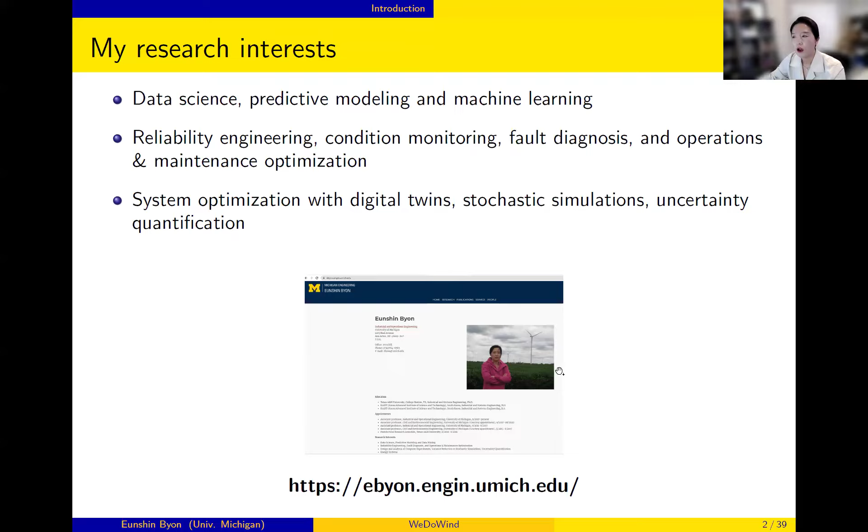Today I'm going to discuss my research on data-driven wake effect characterization. Before presenting, let me introduce myself - my research includes data science, predictive modeling, machine learning, reliability engineering, condition monitoring, and fault diagnosis. My dissertation, like a decade ago, was about operations and maintenance optimization in wind turbines. Recently I'm working on system optimization with digital twins and stochastic simulations, as well as uncertainty quantification.

This presentation consists of two parts. If I don't have time, probably I'll miss part two. Both are related to wake effects. The first part is the data-driven wake effect characterization for operational wind farms.

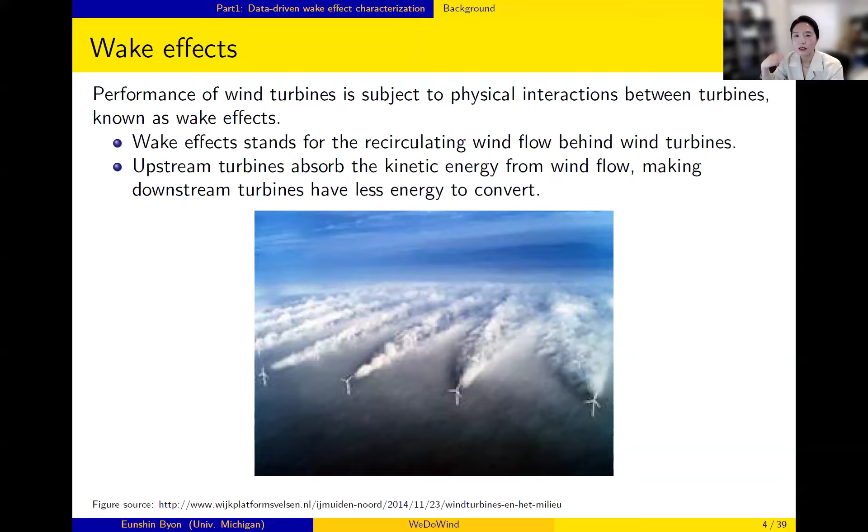I guess the audience of this seminar knows about wake effects, so I probably don't have to explain much. But basically, the wake effect stands for recirculating wind flow behind wind turbines. Here in this study, we use data collected from an offshore wind farm consisting of more than 30 turbines.

Here is the rough layout. Due to confidentiality, I didn't show the exact layout, but we modified it a little bit. This wind farm has regular positions of turbines. You can see that the dominant wind flow is westerly, so from west to east. There is one meteorology tower that collects weather conditions, including wind speed, direction, and other operational conditions.

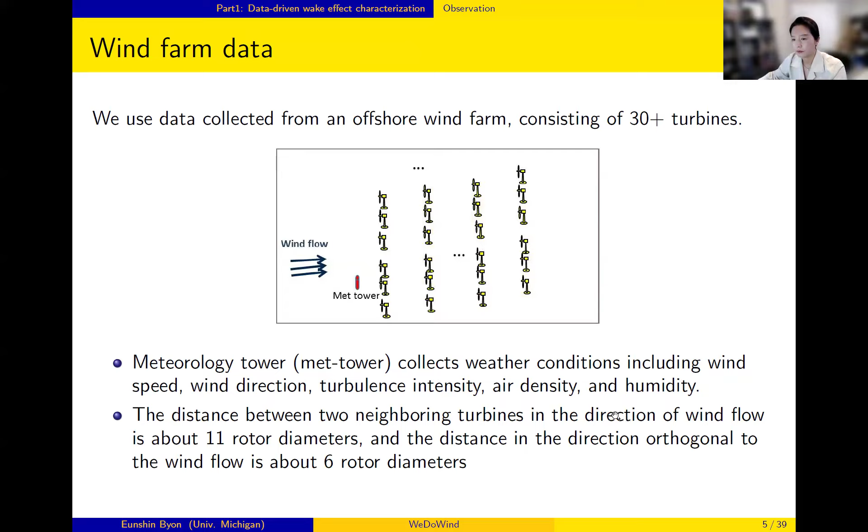The distance between two neighboring turbines in the direction of wind flow, so the distance between two rows, is about 11 rotor diameters, and the distance in the direction orthogonal to wind flow is about 6 rotor diameters. And we did some exploratory data analysis.

So we first choose two turbines. As you can see, turbine A is one of the turbines in the first row, so the upstream turbine, and turbine B is one of the turbines in the last row, so the downstream turbine.

The right figure shows the scatter plot from these two turbines, and the x-axis is the free flow 10-minute average wind speed measured at the met mast - not the wind speed measured in the nacelle, but at the met mast. The y-axis is the power generation from these two turbines. The black cross is power from turbine A, and the red circle is power from turbine B.

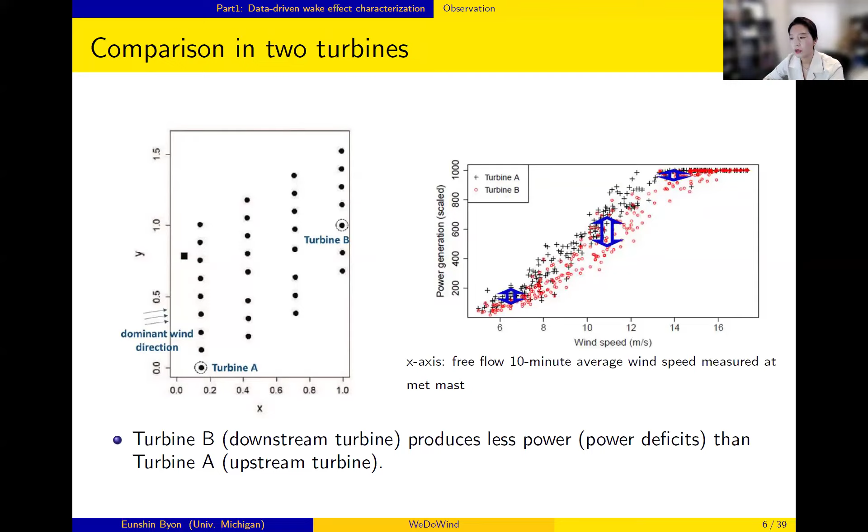Of course, they kind of follow some sort of S shape, which we typically observe in turbines - this is the power curve. However, turbine A tends to generate more power than turbine B, so turbine B experiences some sort of power deficit, and of course that's due to the wake effects.

We extend this analysis to multiple turbines. Here are the power variations among these turbines in this wind farm when wind speed is around 12 meters per second - the darker, the more power. We normalize the power level between 0 and 1,000. As you can see, the turbines in the first row generate a higher level of power compared to other turbines. Second row, less. Third row, more or less. The last row generates the least level of power.

So this turbine-to-turbine variation is very clear when wind speed is around 12 meters per second. Then when you look at this power variation in other wind speeds, interestingly, this variation was not very clear when wind speed is low, around let's say 5 meters per second - close to cut-in wind speed.

The reason is that when wind is slow, the blades rotate slowly, so they extract a minimum level of power energy from the wind. So the wind deficit in the downstream turbines is not really significant, and there are no clear power-to-power generation differences. Also, when wind speed is high, after the rated wind speed, the upstream turbines use pitch control, so they don't extract the maximum level of power they can. So the downstream turbines still face incoming wind with sufficient energy to convert to the rated power.

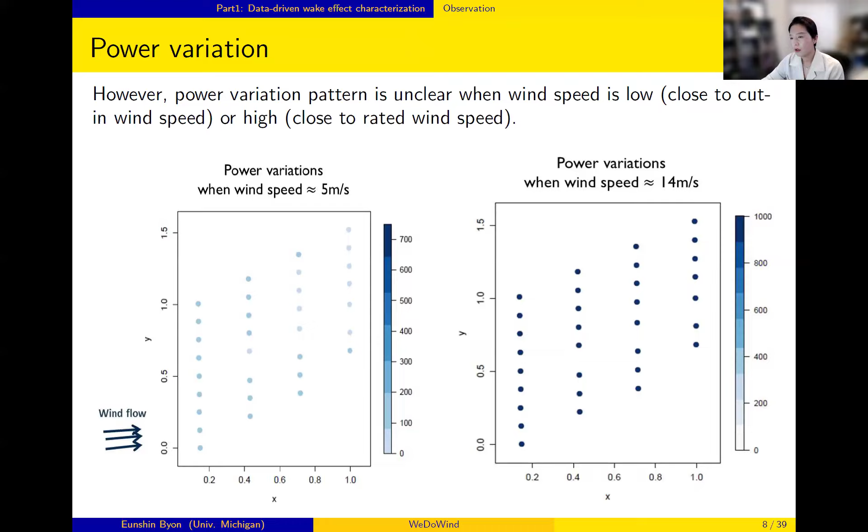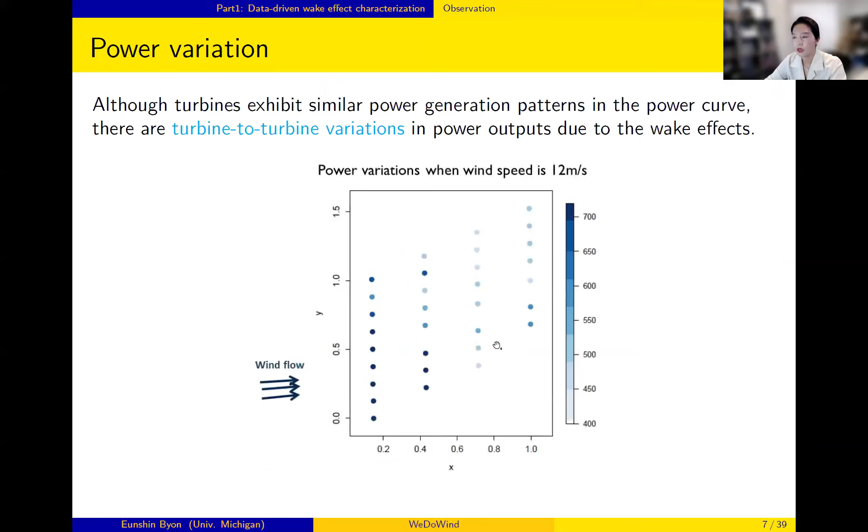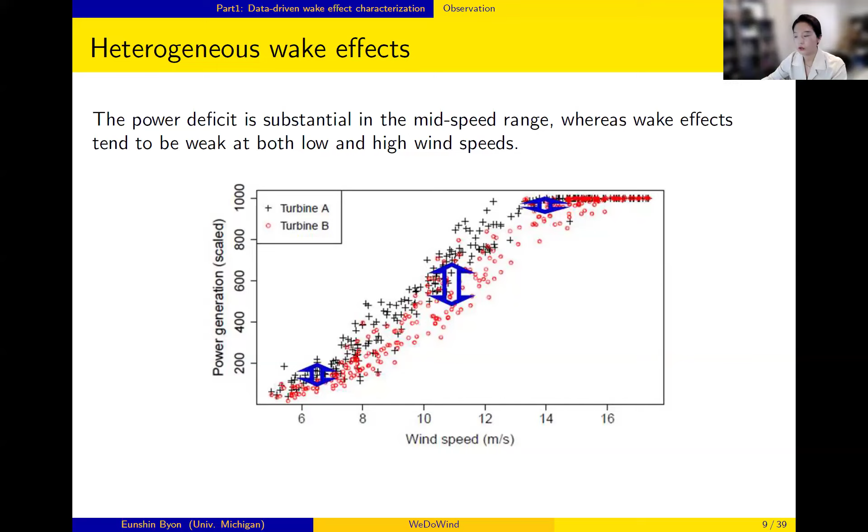After some wind speed, there is no clear power generation difference. Also, when wind travels from upstream turbines to downstream turbines, they can recover energy from the wind to some extent. So depending on wind speed, we see clear or unclear differences. If we look at turbine A and turbine B, the difference is clear when wind speed is in the mid-range, between 10 and 12, but not really clear when wind speed is close to 5 or after the rated wind speed. So we want to characterize this heterogeneous power deficit or wake effect in a multi-turbine wind farm.

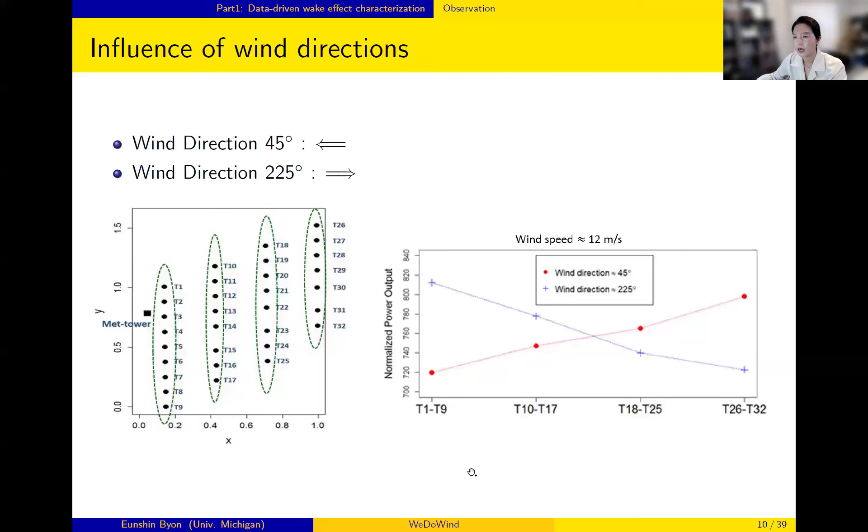Considering this heterogeneous wake effect depending on wind speed and wind direction, we develop a data-driven wake model for an operational wind farm using data, and we investigate how power generation varies across individual wind turbines under different wind conditions.

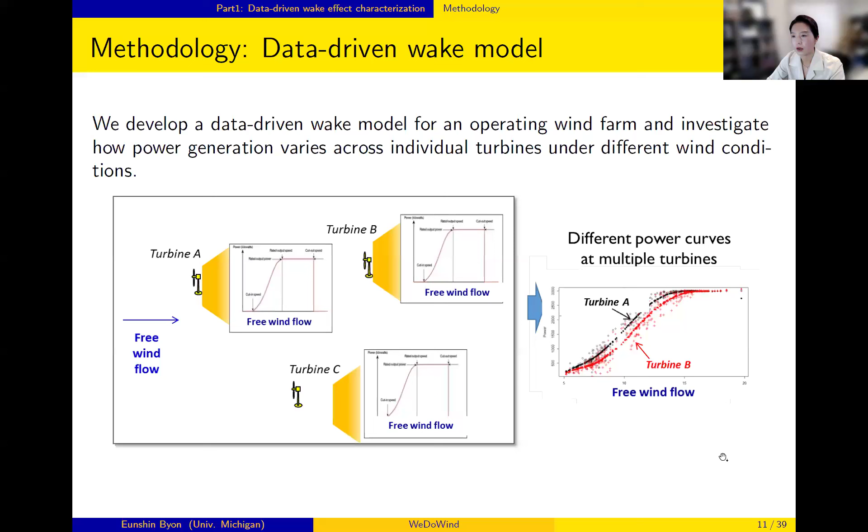Our goal is to characterize this power curve under free wind flow. Mostly the power curve uses the incoming wind for each turbine, but here our goal is: let's say we have free wind flow coming to the wind farm, our x-axis is the same wind flow across all turbines, and y-axis is the power generation from individual turbines. If turbine A is upstream and turbine B is downstream, we will have different power curves due to the power deficit or wake effects. We want to construct a heterogeneous power curve of multiple turbines, which depends on wind condition.

Our methodology is statistical modeling. We decompose the power output into global and spatial terms. The black curve is the average pattern, the average power curve shared by all turbines in a wind farm. But there is turbine-to-turbine variation.

For upstream turbines, the red dashed curve is above the black average curve, meaning the upstream turbine's power curve is above the average power curve, but downstream turbines' power curve is below the average power curve. So there is turbine-to-turbine variation, or spatial variation. We want to decompose the power curve into two parts: the average pattern shared by all turbines, and the turbine-to-turbine variation. Here is the modeling.

Yi is the power at turbine i, and x is the weather or wind condition. We have this global pattern, or average pattern, shared by all turbines, and we have the turbine-to-turbine variation, the spatial term. This S function captures the heterogeneous wake effects, which depends on weather condition. So S is not constant, but depends on weather condition X. X includes wind speed, wind direction, and turbulence intensity.

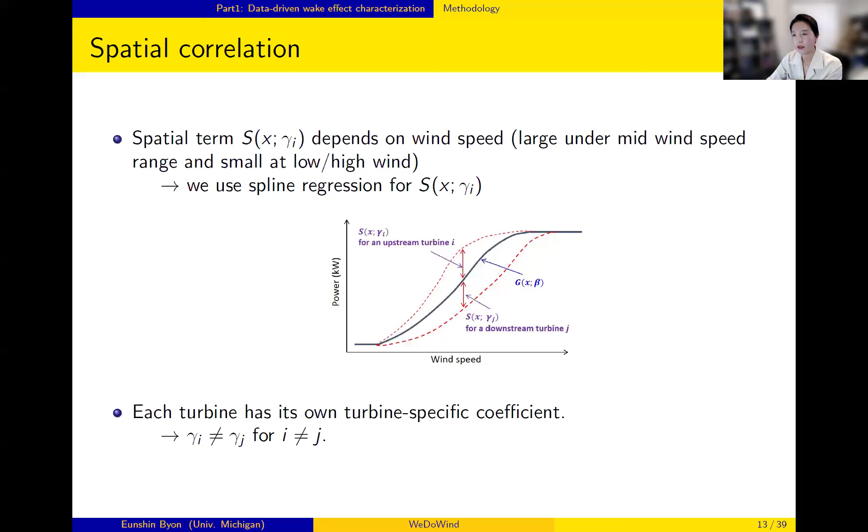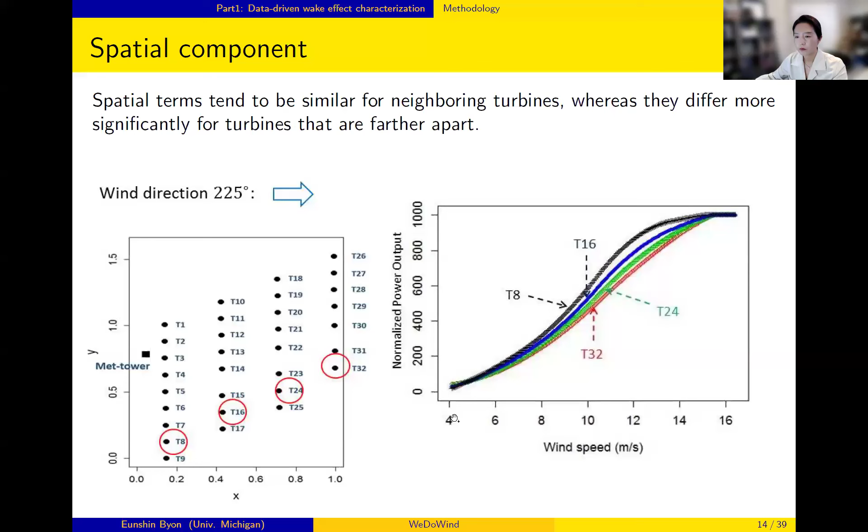To reflect this kind of similarity and dissimilarity, we use a Gaussian Markov Random Field. We formulate the interdependency or interaction among turbines using GMRF. The idea is that here is the coefficient of turbine I, and this coefficient should depend on the coefficient of neighboring turbines. So Ni is the set of neighbor turbines.

For example, let's say turbine C. Turbine C's coefficient should be dependent on the neighboring turbines. Here the red circle shows the neighboring turbines. So gamma I, the gamma for turbine C, should be close to the gammas in these neighboring turbines. That is the basic idea.

Then how much should they be similar or dissimilar? Here, Cij captures the similarity. So Cij is the interaction intensity between turbine I and turbine J. To formulate this Cij, we look at the dependence in the direction orthogonal to wind direction and also parallel to wind direction. So we consider both wind directions, and also the distance between turbine I and turbine J.

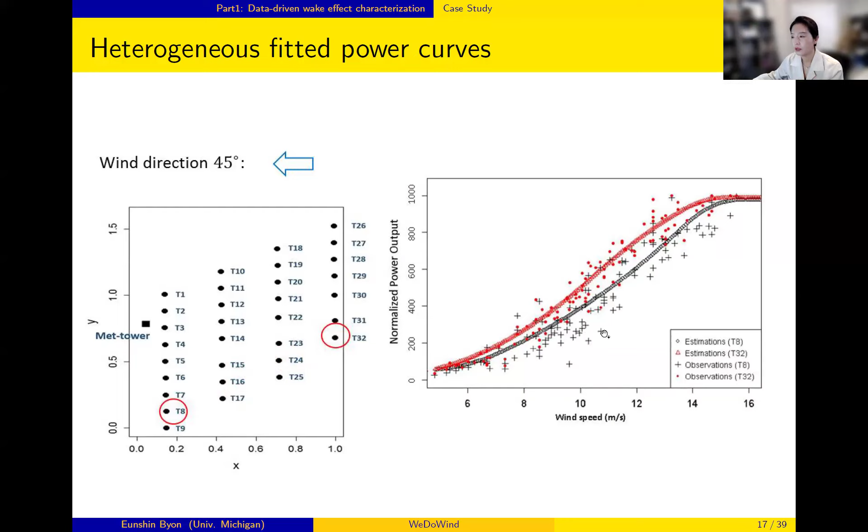After this modeling, here is the power curve which briefly estimates each turbine's power curve pattern. When wind direction changes from east to west, T32 becomes the upstream turbine and T8 becomes the downstream turbine. Here the dots are all the data from these two turbines. Red is the data from T32, and you can see that red is above black in most cases, and our power curve captures this kind of heterogeneous pattern pretty well.

You can also see that this heterogeneous power deficit is very clear when wind speed is around 12, but the deficit is very small when wind speed is small and also when it's large.

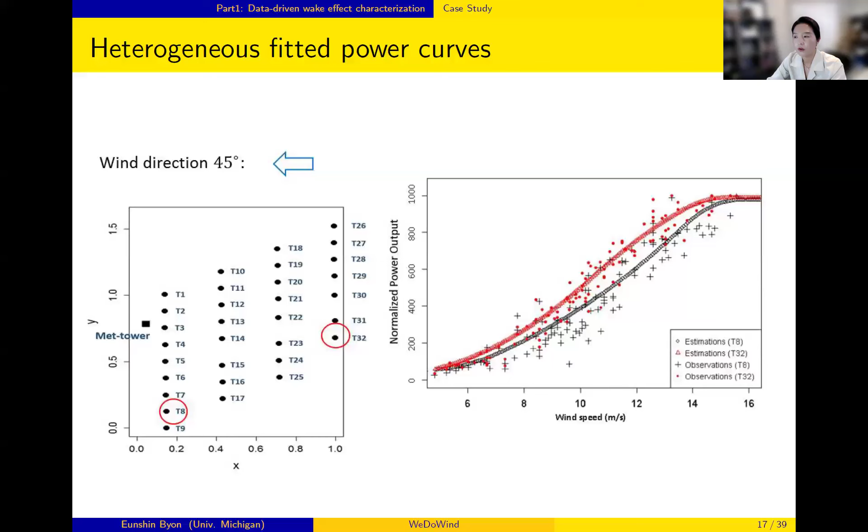But when wind direction is around, let's say 320 or 340, that's the direction from north. In that case, T8 becomes really the downstream turbine, so it generates less power. In other cases, depending on direction, its power level is different. So even though we have the same wind speed around 12 meters per second, the generated power level from T8 is really different depending on wind direction.

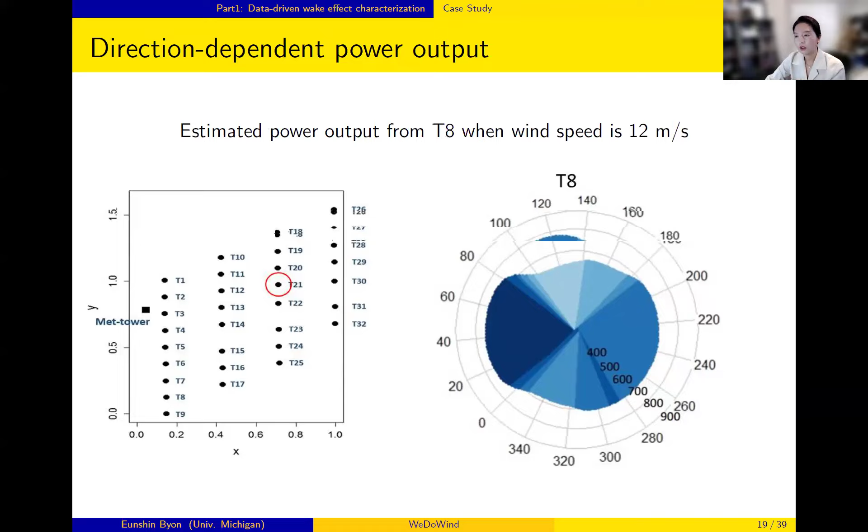This is the power output from T21. T21 is in the middle of the wind farm, so regardless of direction, it's always a downstream turbine. It is affected by other neighboring turbines' rotation, the blade rotation. So we can see that in all cases, it doesn't really show big differences. For example, T8's power level is so different depending on direction. However, T21, being in the middle of the wind farm, generates a similar level of power regardless of wind direction.

But as wind speed increases further, the wake effects become less intensified because of pitch control. So as wind speed goes above rated wind speed, this range becomes smaller, and eventually when wind speed hits about 16 meters per second, there is no big turbine-to-turbine variation, and the deficit becomes much smaller.

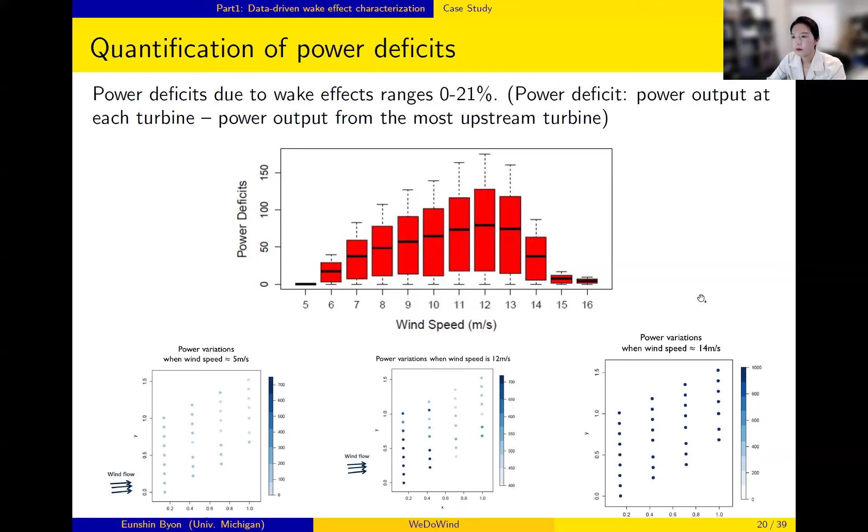Here we compare the performance using data from this offshore wind farm. We use a small data set of 300. Mostly this is data from the dominant wind direction, sort of clean data. Power output is normalized between 0 and 1,000, and this is the result from tenfold cross-validation.

We compare our approach with a global model and an individual model. The global model uses just one power curve for all turbines, and the individual model fits a power curve for individual turbines separately. We use three metrics: RMSE, MAE, and MAPE.

We can see that in all metrics, our approach was better than other models. Compared to the global model, our approach produced 13 to 15% lower estimation errors.

Compared to the individual model, our approach's performance improvement is not really clear because the individual model also fits an individual power curve, so in terms of estimation accuracy they should be similar. However, the individual model uses a lot of models—basically for 30 turbines, it uses 30 different models.

On the contrary, our model just uses one model. So even though we have similar estimation accuracy, our model uses a much less number of coefficients. Also, our model characterizes the interaction among turbines, whereas the individual model doesn't really characterize any sort of interaction to understand the wake effects.

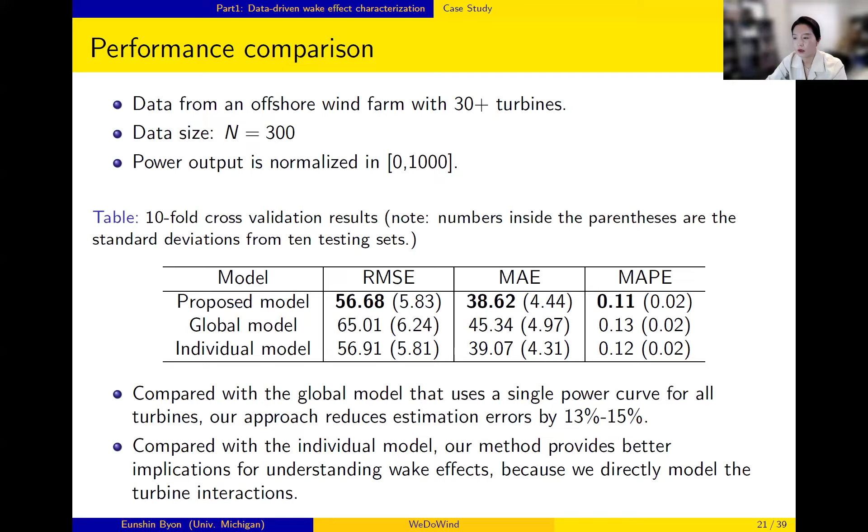We apply this approach to quantify—so far this is the result from a couple of papers—and then we apply this approach to quantify the power gain due to turbine upgrading or retrofitting. I understand this audience has discussed this power gain due to vortex generators several times.

So probably all of you know vortex generators. I don't know the physical characteristics of VGs, but VGs are one way to enhance blade lift characteristics to improve production efficiency. However, this type of upgrading or retrofitting is costly.

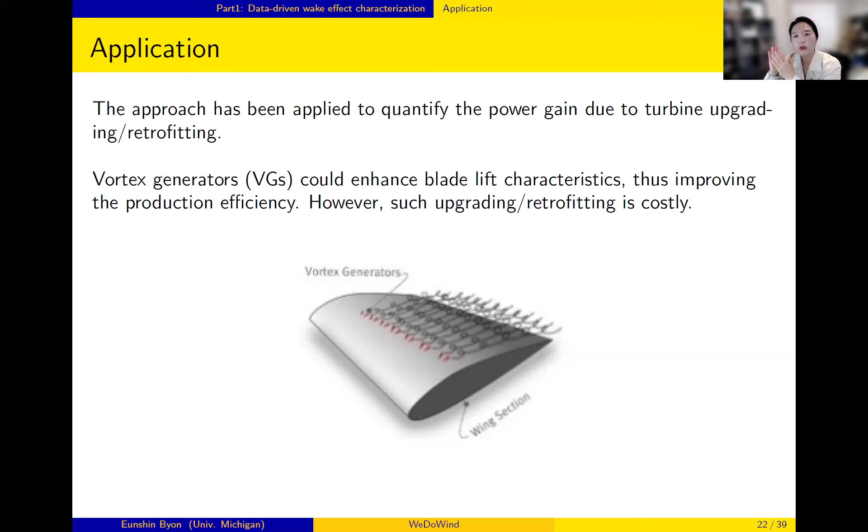So we met one of the utilities in Michigan, and they wanted to know whether VGs are really helpful and beneficial to improve power generation efficiency. They also wanted to do a cost-effect analysis, so they shared their data with us.

Actually, the data was very noisy, and also they didn't really have the Met Tower. So this result just represents the benefits of our wake model, but the numbers may not be so reliable because the data was very noisy. But I want to show how our wake model can be used for retrofitting analysis.

They installed VGs on some turbines, not all of them. So they have multiple turbines in a wind farm, and they installed VGs on some turbines. They have data before the VG installation and after the VG installation.

Here is the data, or the fitted power, from two turbines, T3 and T31. VGs were installed on T3, and T31 is a control turbine, so they didn't install VGs there. In the left panel, you can see the estimated power for T3—blue is after VG installation, red is before VG installation. After the VG installation, the power curve is shifted upward.

So there is a clear power gain, and we can see that the power gain is quite clear when wind speed is around 8 meters per second. So this looks good.

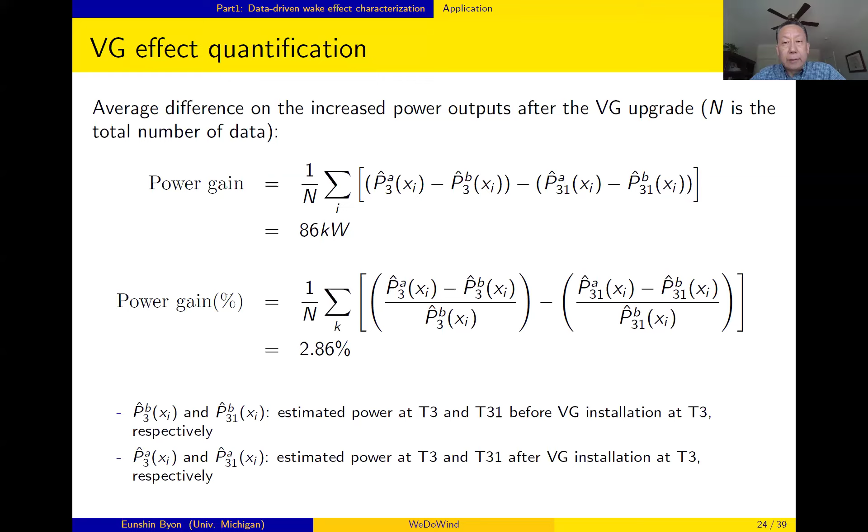Quick question: turbine 31 is not the nearest to turbine 3, right? That's a good question. Turbine 31 is shown here to illustrate the relative difference.

We also looked at the power gain at the neighboring turbine of turbine 3, which was really interesting. Say we have turbine 3 and turbine 4, where turbine 4 is the downstream turbine under the dominant wind direction. Interestingly, turbine 4's power gain was also clear, even though turbine 4 didn't have a VG installation. After turbine 3 got its VG installation, turbine 4's power gain was also positive compared to turbine 3.

I don't know the exact physical phenomena, so I looked at references and found an article saying the VG stabilizes wind turbulence, which positively influences downstream turbines. So when a VG is installed, it not only affects that turbine but also positively affects the immediate downstream turbine. I didn't show this result here because the data is quite noisy.

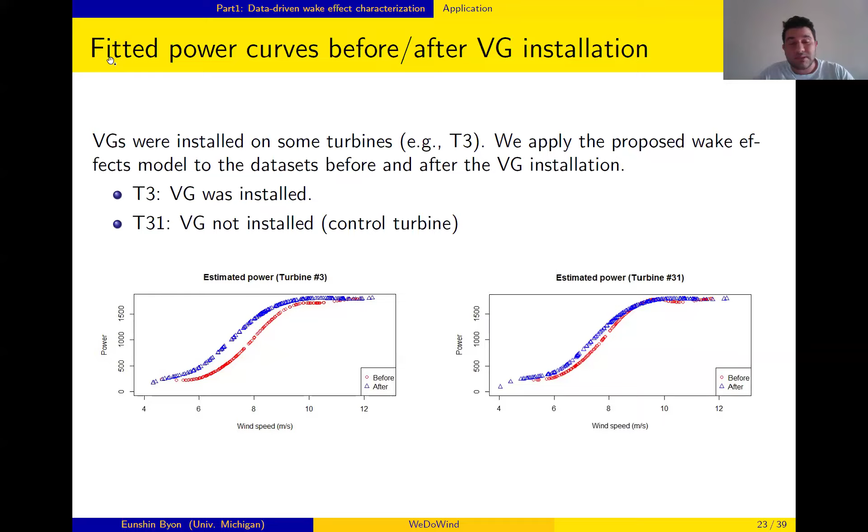Other questions? Yes, I have a question. On the slide, I think it was slide 14 or 15, you defined the set Ni, the nearest turbines.

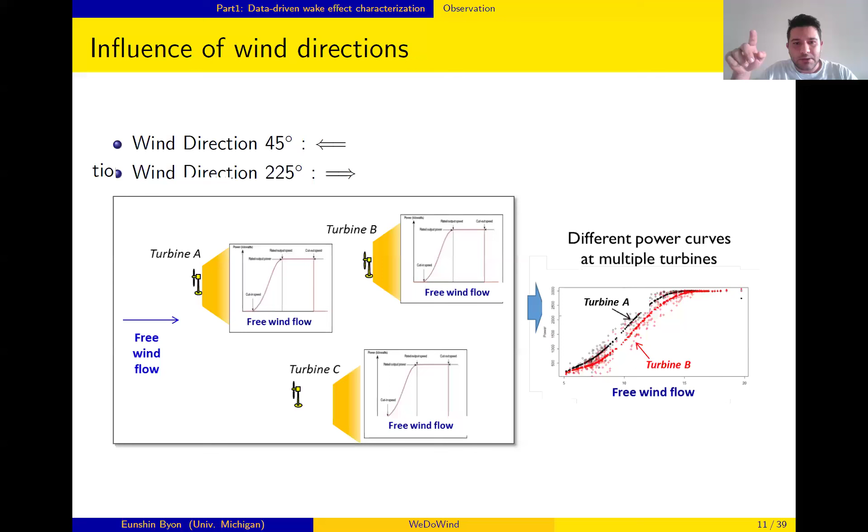So to learn the parameters of each turbine, you define a set of nearest turbines, Ni. I'm wondering, since this definition takes the closest turbines, for those turbines in the corner of the farm you will have fewer neighboring turbines. Does that affect the model's performance by any chance?

That's a good question. First, the first order neighbor turbines are shown in red, and the second order includes the first order plus other surrounding turbines. When we tested the accuracy between first order and second order neighbor turbines, we didn't really see a difference, so using just the first order neighbor turbine was enough.

For the turbines at the boundary, as you said, we have fewer neighbor turbines, but the accuracy wasn't really deteriorated, because we still have neighbor turbines either upward or downward. So we didn't really see sensitive results depending on the location of turbines. Thank you, that's a really good question.

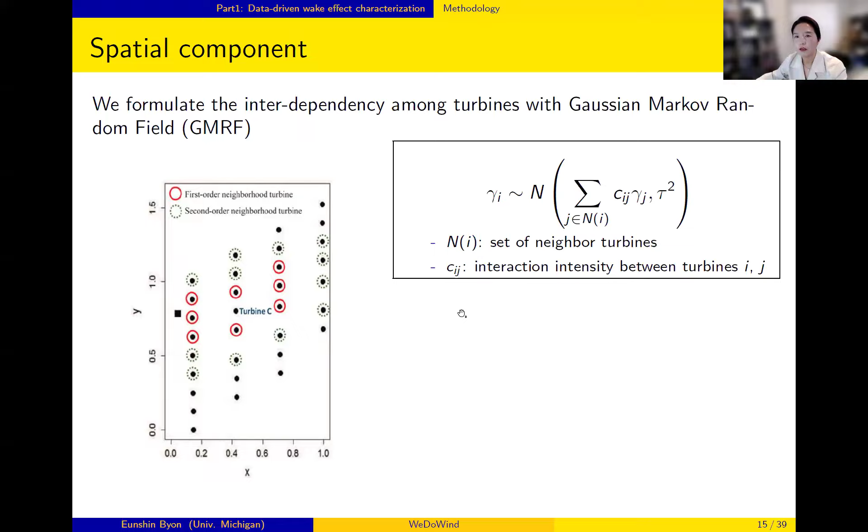Okay, then I can move on to the next topic.

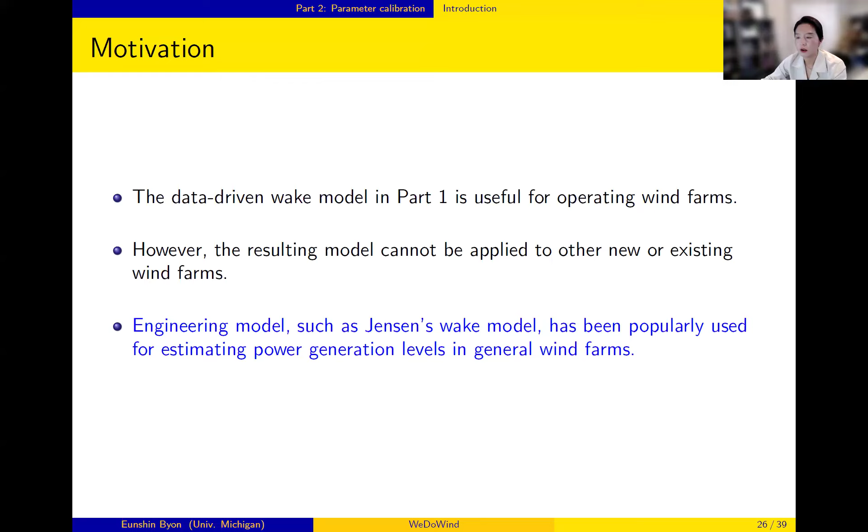So the next topic is parameter calibration in physics-based wake effect models. The data-driven wake effect model we discussed in part 1 is useful for operating wind farms because we use data from operating wind farms. However, this result cannot be extrapolated to other conditions like other wind farms. So we want to explore physics-based engineering models that include first principles, such as Jensen's wake model or other engineering wake models, which have been popularly used for estimating power generation levels in general wind farms.

So we look at the simplest Jensen's model first. Later we use other more advanced wake models. But when we started this research, we first used the simplest Jensen's wake model. Here is the core part of Jensen's model.

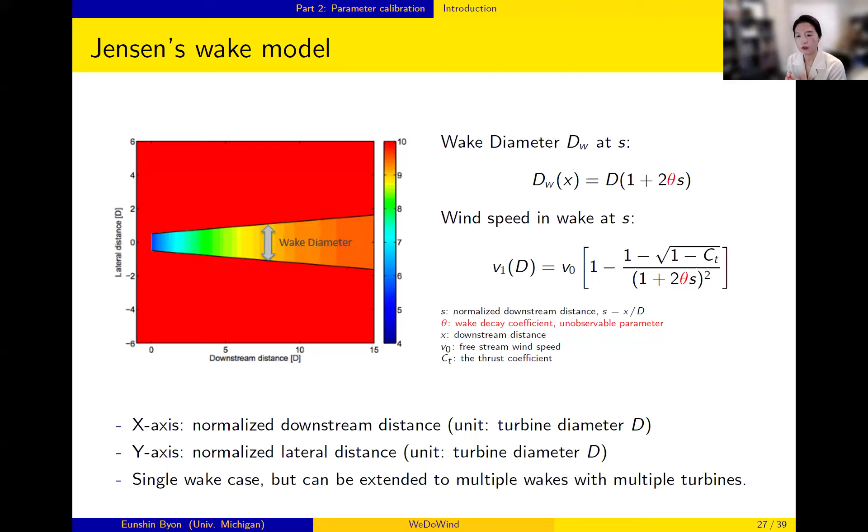The motivation of this study really comes from part one. When we did part one, we compared our data-driven model with Jensen's model. We found that when we used the default offshore value of 0.04, the Jensen's model output was not accurate, but it became more accurate when we used the default land-based value of 0.075. So we thought we shouldn't use the default value in Jensen's model, but instead revisit this coefficient and calibrate or tune it using the data. That was the motivation of this study.

So we need to see how this wake decay coefficient influences the output from the wake model, in this case Jensen's model. This wake decay coefficient affects the wind speed deficit, V1 minus V naught divided by V naught, where V naught is the free flow wind and V1 is the incoming wind of each turbine. In the graph you can see the influence of the wake decay parameter on wind speed deficit. As the downstream distance D increases, the wind speed deficit decreases, obviously. However, depending on the wake decay coefficient value, this wind speed deficit changes a lot. For example, when we use 0.1, the wind speed deficit is this red curve, but when we use 0.01, the deficit is this purple curve.

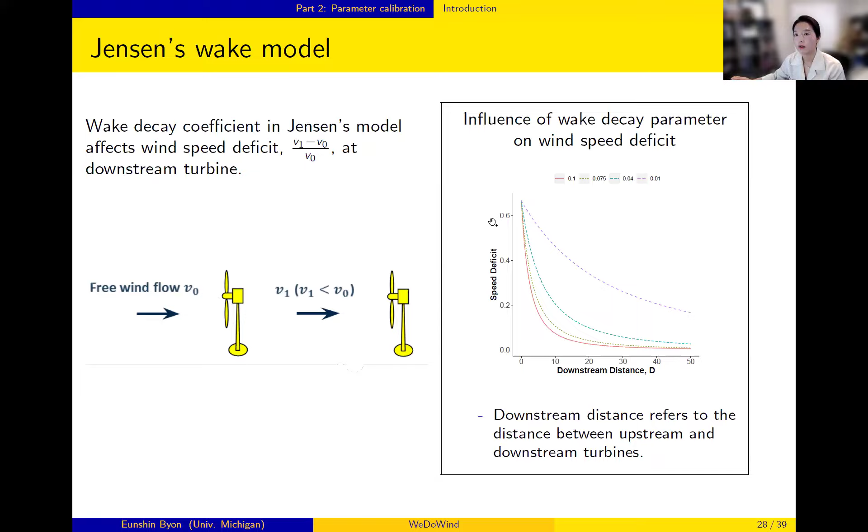So depending on the value, we get very different output from Jensen's model. So we really need to calibrate this wake decay coefficient if we want to use Jensen's model to characterize the wake effects.

So the parameter calibration, we call this parameter calibration, aims to improve the accuracy of the computer model, in this case Jensen's model or an engineering wake model, by finding an appropriate parameter value.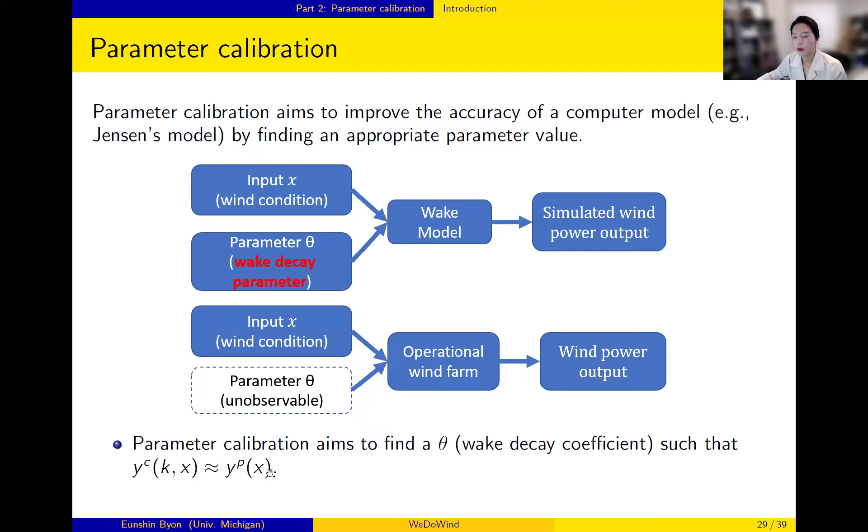So we want to calibrate parameters so that the simulated model is close to the actual data. We formulate this problem as an optimization problem, where J is the data points and capital N is the data size. We want to minimize the difference between the simulated output from Jensen's model and actual data. It's very simple, and here Y is a vector because we have power output from multiple turbines.

Because this is nonlinear optimization, we can use the most popular nonlinear optimization method, which is gradient descent. Gradient descent is iterative. Suppose I start with some theta, let's say theta equals 0.01. Then at every iteration, we move in a different direction, say from 0.01 to 0.008.

This can reduce the difference between the data and our model output, basically reducing our objective function. The direction we should move is given by the gradient. Gradient of f is the direction that increases f, and since we want to minimize the loss function, we use the negative gradient. This is maybe the most intuitive way to solve this problem, and it works really well for many nonlinear optimizations.

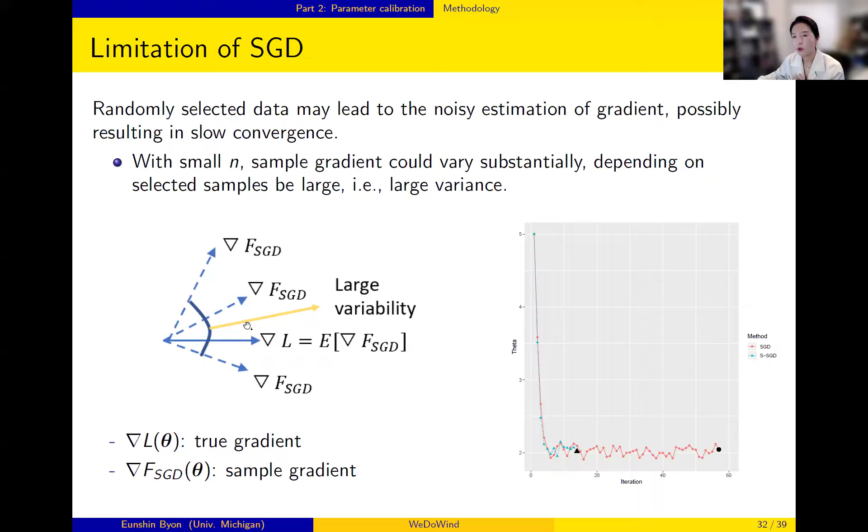So what we do is ask: why don't we control the variance of our sample gradient? We want to reduce the variance of this sample. There's a variance reduction technique widely used for simulation that hasn't been used for SGD. We explore this technique, and there are several types of variance reduction methods; here we use stratified sampling.

In original SGD, from the big data of size N, we just choose a small n, say 1,000 out of 10,000, randomly. That's original SGD. But instead, we divide the input data: data with high turbulence, data with low turbulence, data from mid turbulence and high wind speed range, for example. So we divide the input space, and from each cell we draw samples randomly. S1 is from the first partition, S2 is from the second partition, and so on.

We draw more samples from important partitions. Important partition means when the data varies a lot, the sample gradients vary a lot. So the fundamental idea of this variance reduction is to draw more samples from influential wind conditions. In this case, turbulence intensity turns out to be the defining factor that affects the variance. So instead of randomly choosing samples, we want to choose more influential samples.

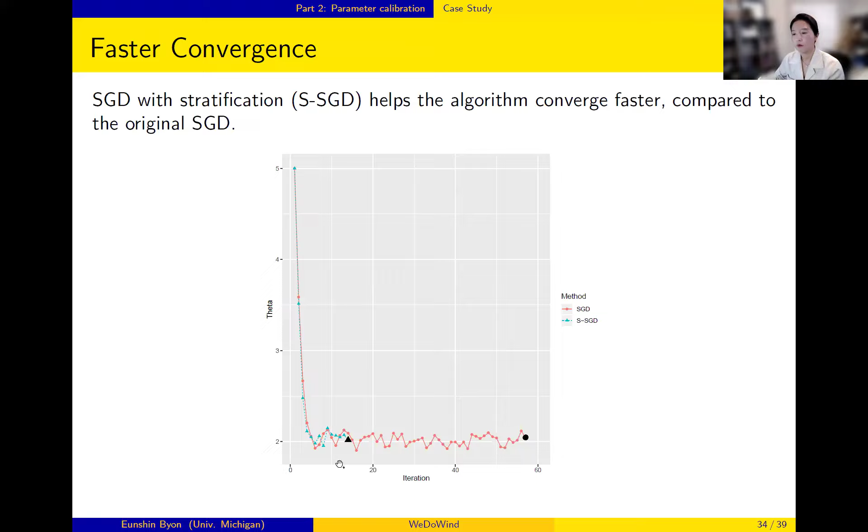I'll skip the details, but here is the result from this SGD with stratification. As I showed before, when we do not apply stratification but just randomly draw samples, the sample gradient varies a lot through the iterations, so it doesn't really converge. But when we use this stratification, the blue shows that it converges within less than 20 iterations.

So we were able to solve the problem much quicker, much faster, and also use much less number of samples. We applied this to the data. This time we used about 1,200 data points, and also used the data under the dominant wind direction. I didn't show how much we were able to reduce the computation, but I think this audience is more interested in the accuracy, so I'll just show the accuracy result.

This is the data from an offshore wind farm, and the default value of wake decay coefficient for offshore wind farm is 0.04, but our analysis shows this should be 0.1. So the optimally calibrated value was 0.1. When we use 0.1, we were able to reduce the power generation estimation error by 35% compared to the default value. So we think the wake decay coefficients in Jensen's model and other engineering models should be calibrated with data to improve the accuracy of the engineering model.

Here is the result for Jensen's model, but later we also implemented our approach in other wake models, such as the Gaussian wake model. Now we are extending this approach for functional calibration, where the parameter is a function of weather variables. Here, same data, wake decay coefficient—when we use this wake decay coefficient as a function of weather condition, like wind speed and direction, we may enhance the result. So we are considering functional calibration. We are also working on dynamic calibration, where theta changes over time.

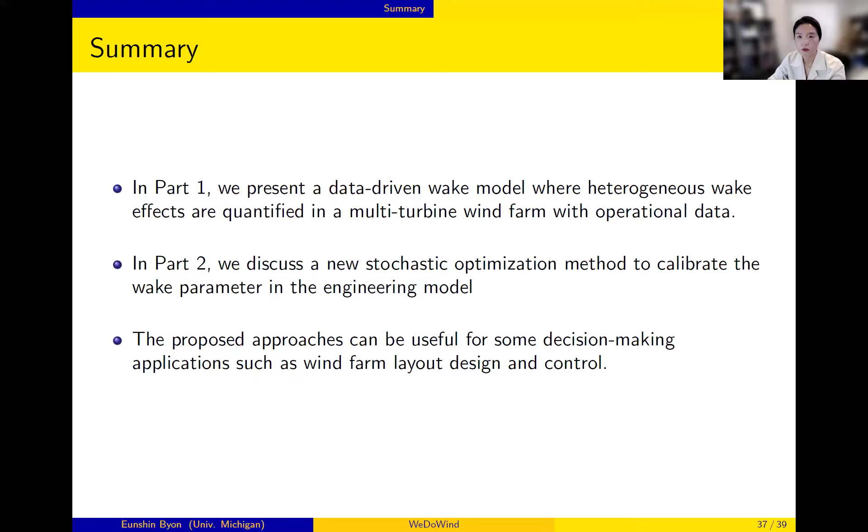So these are the approaches we are currently pursuing in our research group. In summary, in part 1 we presented a data-driven wake model where heterogeneous wake effects are quantified in a multi-turbine wind farm. In part 2, we discussed a new stochastic optimization method to calibrate wake effects in engineering models. We believe these approaches can be useful for decision-making applications, such as wind farm layout, design, and control, as well as retrofitting analysis, as we discussed.

You can find some related publications, and I also posted the data and code on the GitHub page. So if you are interested, you can visit this GitHub page or my website to get more information. Thank you so much.

Well, thank you, Eunshin, especially for sharing your data. I think that's very important for other people to try your method, and also they could possibly use the data for something else, right? So we have 10 minutes left. Any questions from the audience?

Yeah, thanks, I just have one question. Thank you very much, first of all, for the fascinating talk, and it's really interesting to see how you used this very valuable resource of data to tune the model. I just was wondering if you ever considered splitting the data into different atmospheric conditions, stable atmosphere versus unstable atmosphere, to see whether you saw different wake decay parameters for those different atmospheric conditions when you fitted it.

Right, yeah, that's a good question. I think in a recent paper, the second to last paper, published in Applied Energy, we considered different stability conditions, and we calibrated parameters depending on that. We divided the data when the condition is stable or unstable, and we calibrated parameters differently. I don't remember the result off the top of my head, but yes, we had some analysis depending on stability. Thank you very much. Thank you.

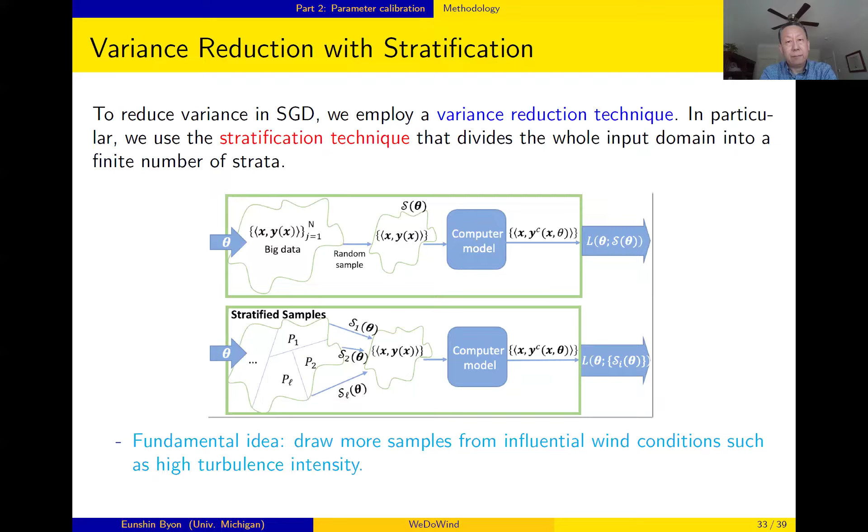This is not a closed form. For example, Y superscript C - Y is the data, so we have numbers, but Y superscript C is a function, and it's not a closed form function, not like AX squared plus BX plus C. To evaluate this function we have to run Jensen's model, so we have to call Jensen's model. My guess is we cannot use the existing nonlinear optimization package.

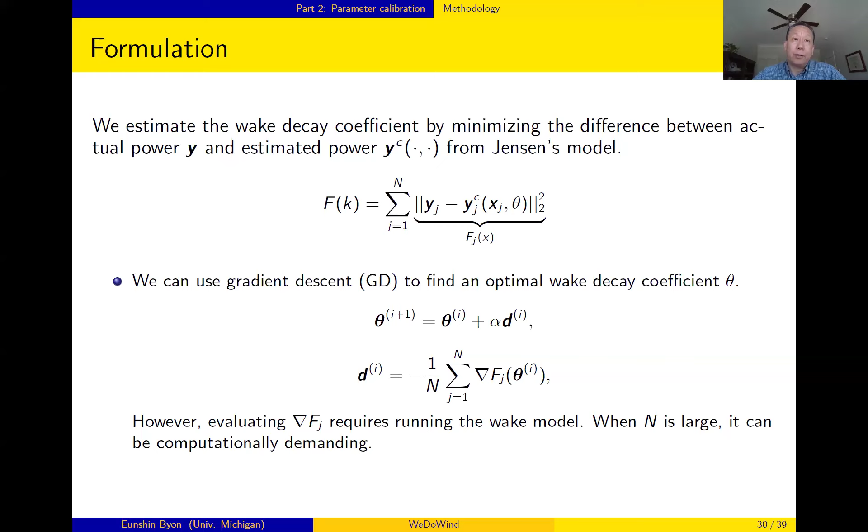Another question: the coefficient in the Jensen's model you estimate ranges from 0.04 to 0.1, which is quite substantially different on the surface. What do you think - is it because this number was obtained many years ago and nobody updated it afterward, or because old turbines versus new turbines are different, or something else? You might not have an answer, I just thought I'd ask in case you have something to share.

That's a really insightful comment. I think the recommended value was from decades ago, maybe several decades. Jensen's model was devised in the 1980s, so I believe at that time people may not have had big data from many operational wind farms. The turbines are different too, right? Yeah, turbines are different too.

So I believe we have to revisit this coefficient and see what the value should be for each farm. If we can relate the optimal value with farm characteristics - like offshore, onshore, or terrain - then we may have a better idea. For example, if the terrain is irregular, the coefficient should be a certain value, or this value is better than the old one.

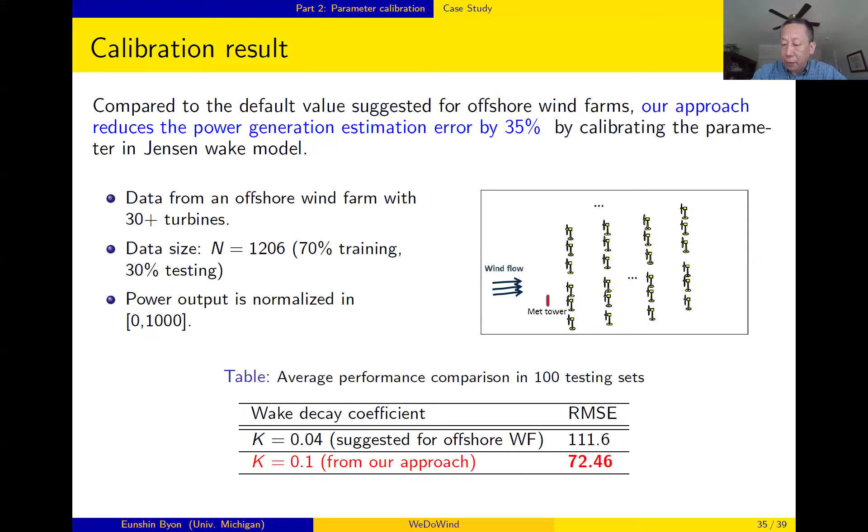Okay, well thank you very much, Eunshin, for sharing your research with this group.